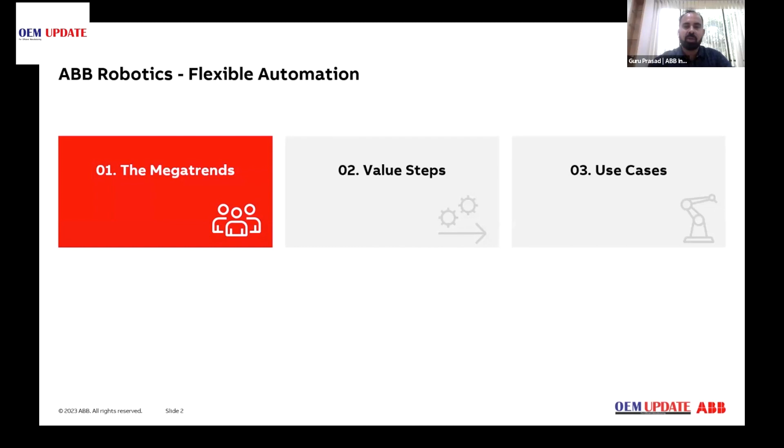Before going ahead, a few disclaimers. Since I'm from a company who prima facie is into robotics and manufacturing automation, please allow me to use a few videos to explain whatever I speak rather than the slides. I hope it will be interesting for you. And second, some of these videos may not be professionally shot, so it will have some sound issues or maybe not really great sound background, so excuse me for that.

Speaking about the megatrends, any given industry is going through these megatrends quite naturally because we are quite an evolving population in the global village. So each of us would like to have something of their own as customized. So this is leading to hyper customization, or some people call it as batch size one. And there is a steady and clear increase of e-commerce and direct to consumer. This is applicable for pharma also. The likes of Tata 1mg are really setting the trend in this direction. And of course, labor shortage, sustainability, health, and hygiene cannot be overemphasized. These are basic trends which are driving any given industry, and pharma, food, and FMCG is no exception on this.

And when we add the key mega trends with the customer needs, which are simply put into these four terminologies of productivity, cost savings, flexibility, and simplicity - we believe we as ABB, especially the robotics side, have a solution for all these mega trends and customer needs put together. How? We will look at it in the next few slides.

And before going ahead with this, the key topic, which is pick, pack, and palletize, the sectors or the segments which we cater to from the consumer industry side. On the manufacturing side of the industry, we look at automating our customers' secondary, primary, and tertiary packaging activities in food and beverage, consumer packaged goods, and pharmaceuticals. And on the service robotics side, which is basically the customer-facing or consumer-facing side, I would say, we automate various applications in restaurants.

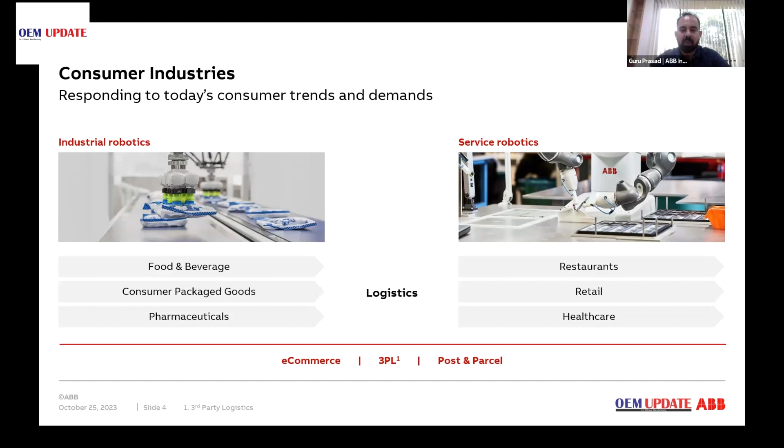Cloud kitchen being a very good example. Retail last-mile delivery or delivery kiosks, for example. Then healthcare - nowadays, the simple activity of conducting a blood test is also being automated in some of the developed parts of the world. Soon it is going to come into developing countries like us. And what connects these two is logistics, whether it is logistics related to e-commerce, third-party logistics, or even post and parcel. Lots of scope for automation, lots of applications to be automated. I think the rest of the panel speakers today will also speak about the importance of logistics.

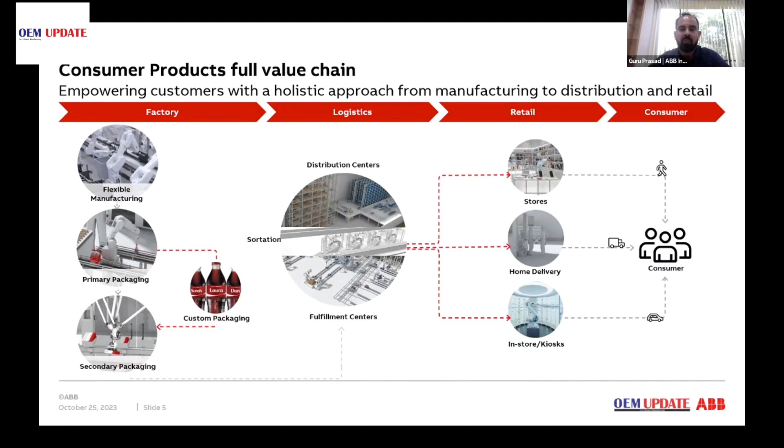And when we speak about factory, as I was mentioning earlier, we automate everything from handling the naked products to putting these products into flow wrapped pouches, and then putting these pouches into carton boxes, and putting these carton boxes into big shippers, and palletizing these shippers onto pallets, and taking these pallets and giving it to an ASRS, retrieving these pallets, and then once again redistributing the contents of the pallet in terms of truck loading, or when it comes to the consumer side, even the logistics part in terms of distribution centers, fulfillment centers - lots of things we automate in the complete value chain of consumer products, which includes pharmaceuticals also. How we do it is summarized in the form of a slide here.

So basically, we are a robot manufacturer, but we are more than a robot manufacturer also. What we mean by that is robots and its peripherals, whether it is robots or its associated hardware in terms of AMRs or AGVs, and associated software, is what we manufacture from our factories. And when it comes to countries like India or any other large ecosystem which we have, we add more value to the products which we manufacture, and we manufacture something called application cells or modular cells.

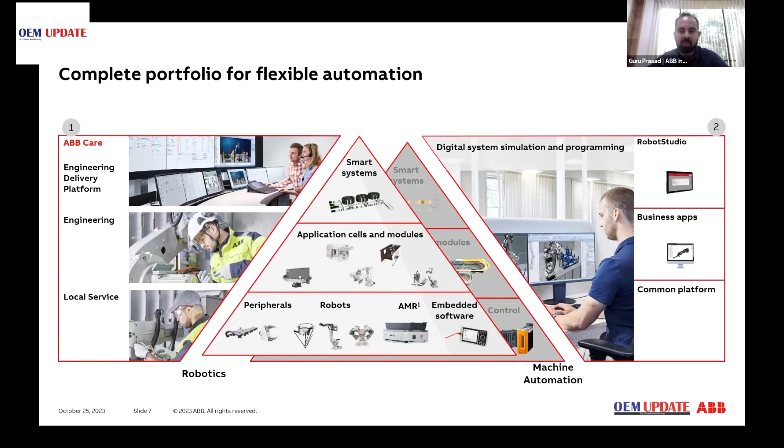Now, with the help of a few use cases, I'll drive through the topic of the day. This is a specific use case applicable for food, FMCG, or pharma. In typical use cases like this, you have multiple conveyors. On one conveyor, either a naked product or a flow wrap product is coming, and these could be very odd shapes, like a pizza dough or a chocolate cake, or anything with a very odd shape. This could be a hard profile like a typical Cadbury, or a very soft profile like a cheesecake. This involves tracking multiple conveyors.

Why tracking multiple conveyors? Because all these conveyors run at different speeds, and we're picking up from one conveyor and placing it onto another with the help of an industrial robot, doing this at very high speeds. What do we mean by very high speeds? The business case here involves moving products from 100 picks per minute to up to 400 picks per minute.

Other parts of the business case for this kind of automation in food, FMCG, and pharma include improving the hygiene index, manless operation, and improving traceability with the help of vision systems and various scanning solutions like barcode and QR code scanners. We improve traceability of the product, including possible detection of quality defects, even to the extent of detecting a very small foreign particle like human hair. With all this, as in the megatrend slide, we provide an experience of customized packaging, or batch size one kind of production.

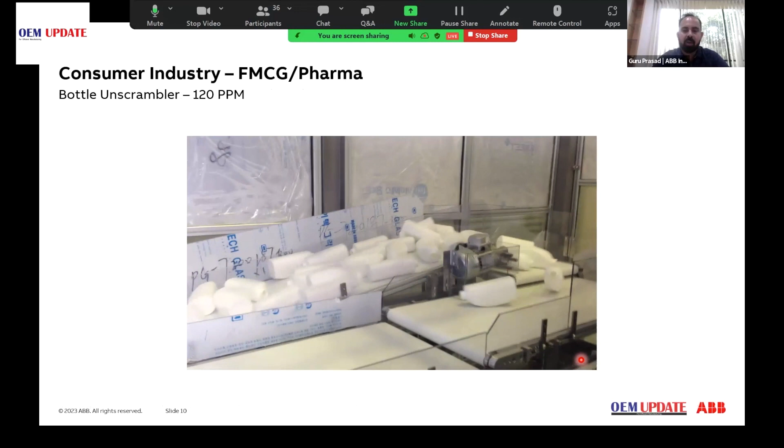Sorry about the sound, as I mentioned in the disclaimer earlier. In this particular video, as I was mentioning in the slide before, we are tracking two conveyors, and we have products coming from one conveyor. In this case, it's a sanitizer bottle. We are picking it up using a vision system here, which provides a pick point. The same vision system can be used for analyzing quality defects and for checking foreign particles.

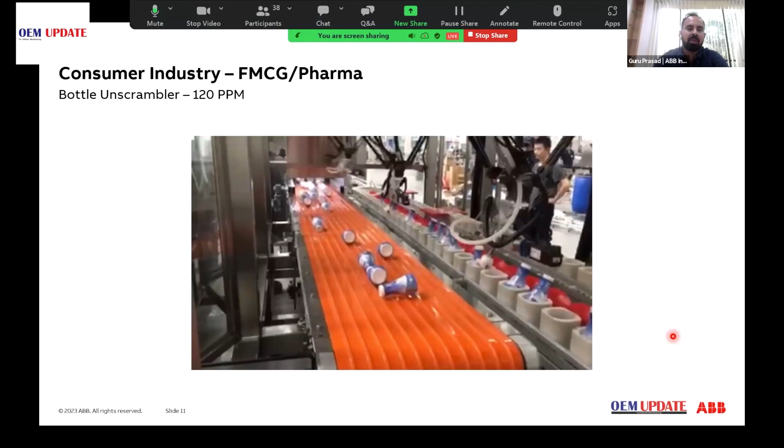Using this vision system and tracking this conveyor, I'm able to pick up this product in a horizontal orientation and place it into vertical orientation into something called a puck. The bottle in the puck is stabilized later half of the conveyor, and then it goes into the filling area. So this is a typical example of picking and packing automation.

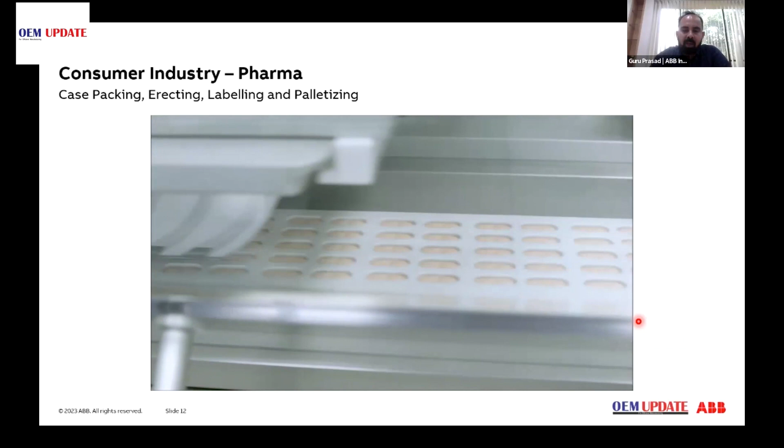Another typical example of automation which covers the entire spectrum of picking, packing, and palletizing is shown in this video. Here, of course, we have to integrate with various customer equipment, customers' conveyors, and equipment related to primary and secondary packaging, filling the products into monocartons and then the monocartons into shippers.

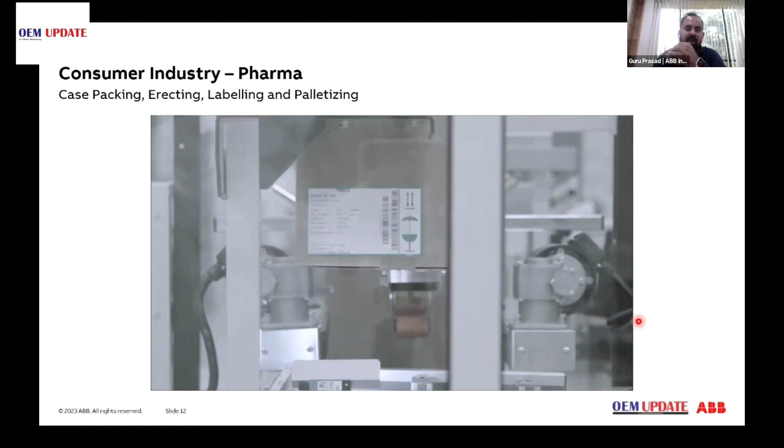Of course, this being a low-speed line, we are utilizing an industrial robot to erect the carton also, rather than using a dedicated carton erecting machine. The same robot which is erecting the carton is also being utilized for palletizing the fully filled cartons. And we have AMRs to ship out the fully filled pallets within the factory shop floor. This is as far as the industry side, or the manufacturing shop floor side, is concerned.

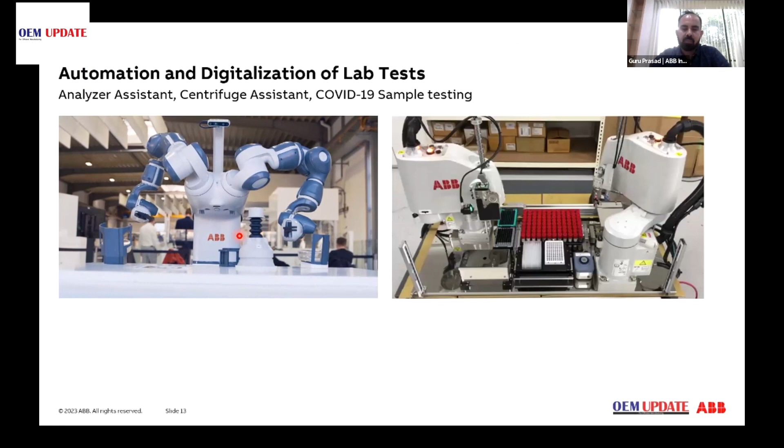Then, if you look at the trends of the future, robots are entering into various kinds of testing applications, whether it's automating sample testing in a typical diagnostic laboratory, automating drug testing which requires hours of permutations and combinations in a company involved in drug discovery, or testing highly contagious samples. For example, on the right-hand side, you're seeing a couple of robots doing sample testing of COVID throat swabs.

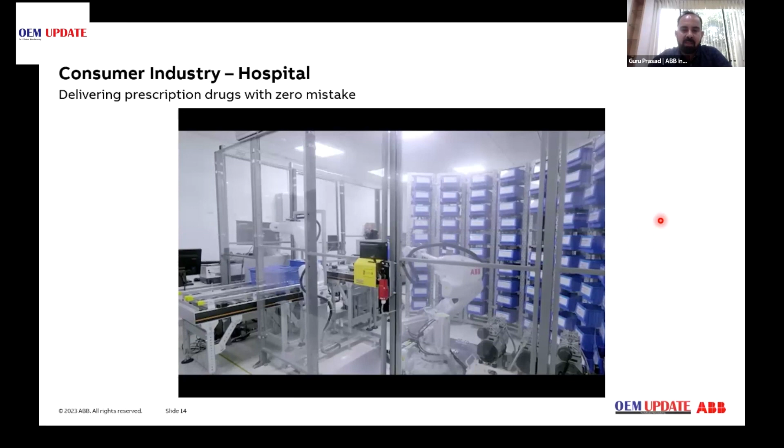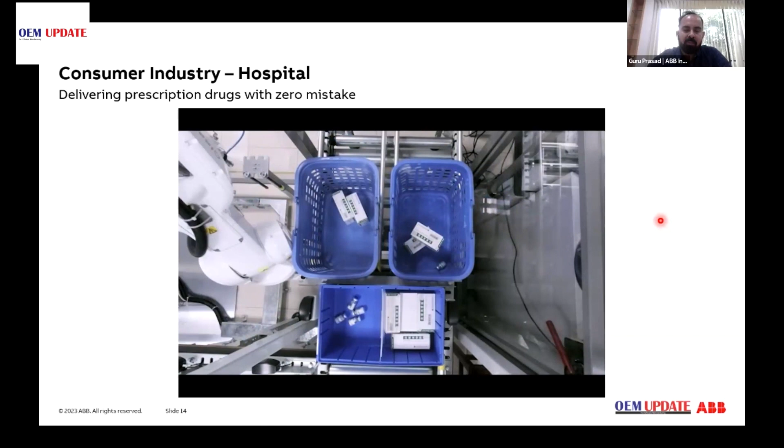Then, moving into the next level of automation when it comes to drug delivery or delivering prescription drugs with zero mistakes, is a solution where you have robots surrounded with racks, all communicating with custom-built software which understands the prescription from a doctor and then delivers it accordingly to the customer side of the pharmacy. So with this, I hope I could give you some clarity on the automation trends in pharma in terms of pick, pack, palletizing, and some futuristic trends.